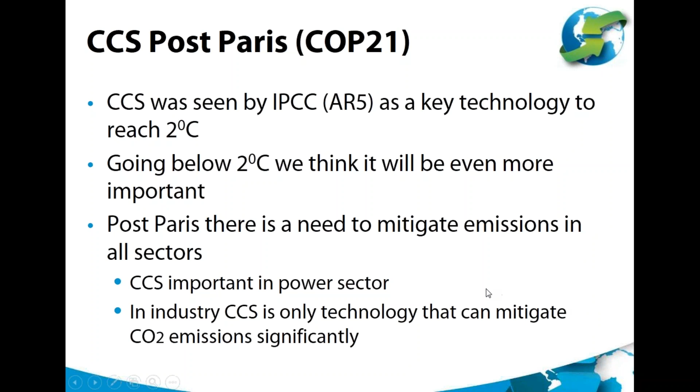A lot of the work we've done has already shown that CCS is important in mitigating emissions in the power sector, but increasingly we're seeing that CCS for industry, particularly heavy industry, is probably the only technology that can really mitigate CO2 emissions significantly in that area. So this work is very important to us.

We've undertaken a number of case studies over the years. We started working on the cement sector in 2008, and did a very detailed techno-economic assessment on an integrated steel mill in 2013. This latest study in the series, on pulp and paper, will be followed quite quickly by work on hydrogen production and methanol urea manufacture. We also have a hydrogen refining study and an LNG production effort underway.

So this year will be the culmination of all our work on industrial CCS, and then we propose to do a covering summary of everything that's happened in this area at the end of it, particularly aimed at advising policymakers.

One key learning, which my colleague Stanley Santos always advises, is that CCS in industry is very site specific. So where we do a detailed study on a specific area, you can't really generalize that into conclusions on how CCS and costs might occur across the whole sector—it's probably far more site-specific than the power sector. Nevertheless, each study is very opportunistic in its own right and delivers a set of information that helps us build the bigger picture for industry-based CCS and the costs associated with it.

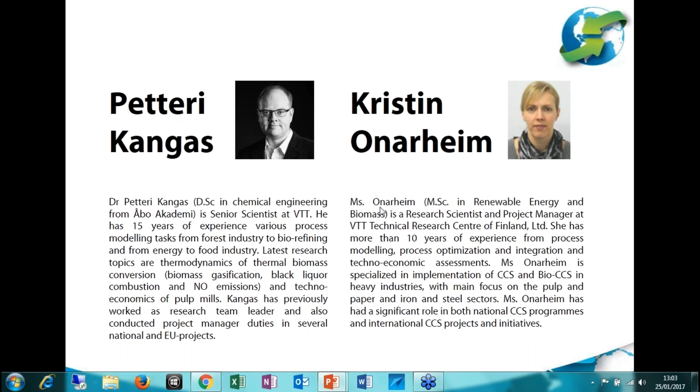Thank you, John, for the introduction, and good afternoon, everybody. We are presenting today the results of assessing the retrofit of post-combustion CO2 capture in the pulp and paper industry. I'd like to acknowledge my co-authors in this work: Stanley Santos from the IEA Greenhouse Gas R&D program, my colleague here today Petteri Kangas from VTT, and Ville Hankalin from ÅF Consult in Finland. This work was undertaken as a cooperation between the Finnish National CCS program and the IEA Greenhouse Gas R&D program.

In order to limit the global temperature increase to 2 degrees Celsius or even lower, as laid out in the Paris Agreement, the IPCC calls for solutions that can allow for negative emissions and actually remove CO2 from the atmosphere. Removing CO2 from the atmosphere could be possible by capturing and permanently storing CO2 generated during conversion of biomass.

An important prerequisite for assuming carbon negativity is sustainably sourced raw material, because if raw material is not sustainable, there is a risk that we don't only miss out on any carbon negative potential, but in the worst case, we can even go carbon positive.

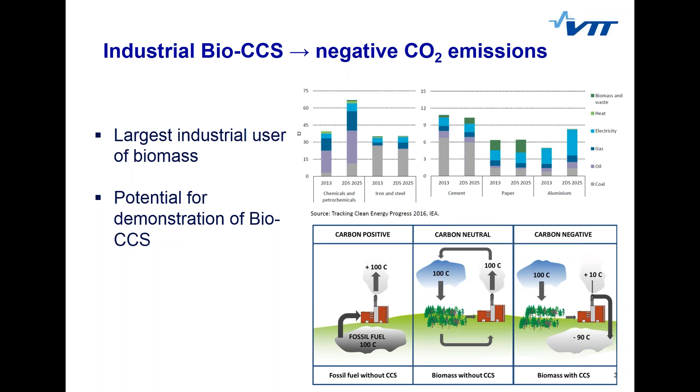So I would like to hand over the presentation to my colleague Petteri Kangas, who will present the reference pulp mills evaluated in this study.

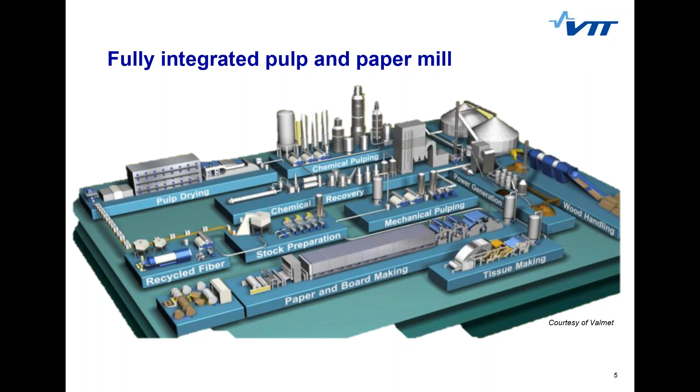Our reference pulp and board mill is located in Nordic countries such as Finland, Sweden, Norway, maybe Canada, Russia. Here is a picture of an overall pulp and paper integrate. In our study we didn't include all of these units, but we had either a standalone pulp mill or an integrated board mill. Typical units such as wood handling, chemical pulping, pulp drying, stock preparation, board machine, and related chemical utility plants are included in this reference mill.

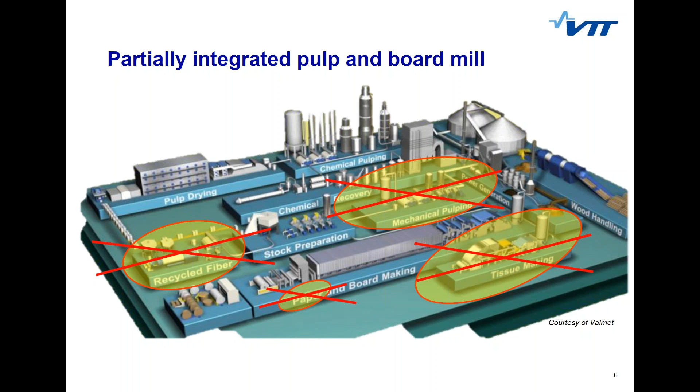Heavy fuel oil is in our case utilized in the lime kiln for producing heat or running the kiln. Then some fresh lime is also used for the process.

In general we have three different sources for CO2 emissions. The one I just talked about, the lime kiln, is one. The second is the multi-fuel boiler, where all the bark and wood residues are burned. And by far the largest source of CO2 is the recovery boiler, which is utilized for converting the black liquor to energy and then recovering the cooking chemicals.

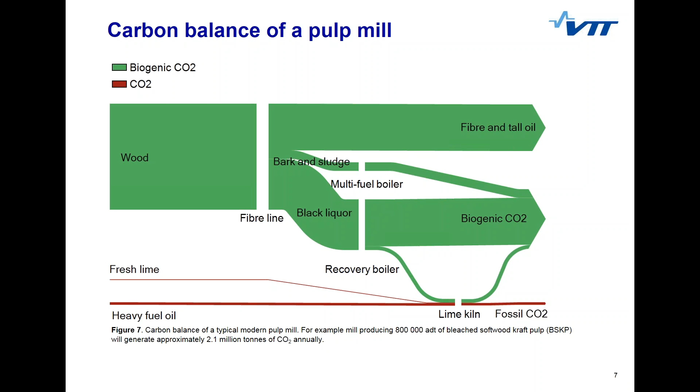One particular thing for the pulp industry is the lime kiln. If you think about the cement industry, these rotary kilns are a large source of CO2 emissions. But in the pulp industry, in fact, almost all CO2 is biogenic, because the CO2 is eventually coming from the wood.

It is dissolved within the pulp digester. Then the black liquor, containing the lignin and part of the hemicellulose, is combusted in the recovery boiler, and the CO2 is converted to sodium carbonate.

Then this sodium carbonate is again converted to sodium hydroxide, and the carbon dioxide goes with the calcium carbonate. The calcium carbonate is burnt, or calcinated, in the lime kiln, and all this CO2, which is originally from wood, is released.

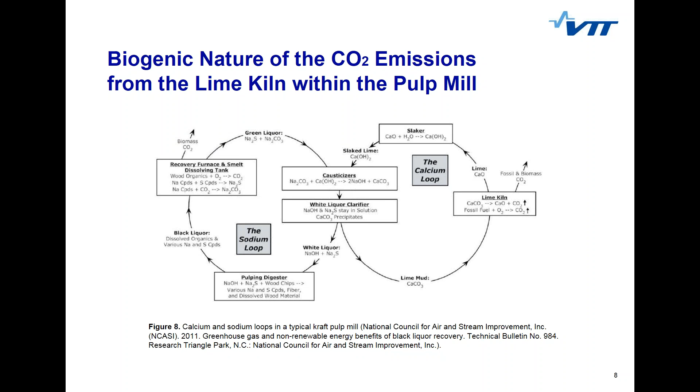So practically, the calcination reaction's CO2 is coming from biogenic sources, and only the fossil fuel utilized for running the kiln is fossil-based.

If we look at the reference mill in general, we have this fiber line where the wood comes in, it's delignified, then it's bleached for removing the brown color, and finally dried in the pulp dryer. If we are talking about the standalone mill, then the pulp is sold outside.

The production in our reference mill is 800,000 tons of pulp annually. It's a little bit smaller than, for example, the new pulp mill currently being built in Äänekoski in Finland, with a capacity of something like 1.2 million tons annually. But otherwise this represents a typical, modern pulp mill.

In that case we have quite a lot of excess heat and electricity available because the processes are efficient. If we look at the recovery line, we have evaporation where black liquor is evaporated, then it's combusted in the recovery boiler, then the lime kiln for recausticization and so on. The multi-fuel boiler is used for combusting the bark and other residues.

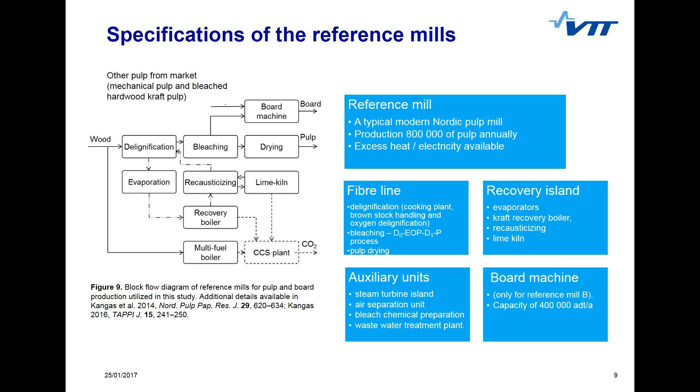In the second reference mill, we call it base case B, we also have the board machine included. The major difference here is that the board machine is of course utilizing some of the heat, electricity, and also pulp, so we do not have as many gigajoules available for the CCS plant to run—less excess heat available in this second reference case. If we go further, we see the rough material balance of this mill.

The wood utilized for producing 800,000 tons of pulp annually requires 4.6 million cubic meters of Nordic pine and spruce altogether. We also use cooking and bleaching chemicals, with sodium hydroxide about 30,000 tons annually. Quite a lot of cooling water, mainly for running the turbine, is needed, but luckily our mill is located by the coast or by the river, so that can be handled.

Electricity utilized or produced in the mill is 900 gigawatt hours per year for the standalone mill, and for the integrated case a little bit less, 530 gigawatt hours per year. Besides the electricity, the other important side product from the pulp mill is crude tall oil, about 30,000 tons per year produced.

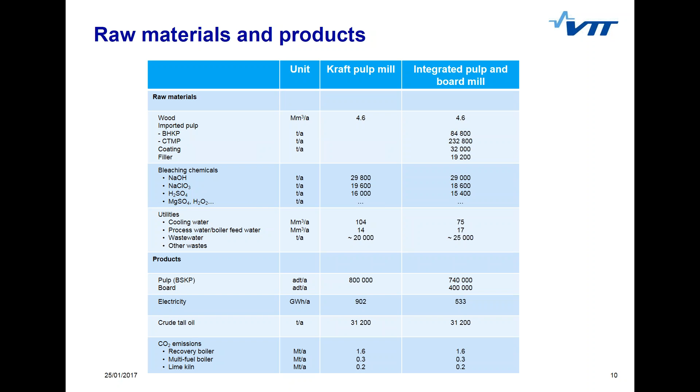Looking at CO2 emissions, the recovery boiler is by far the largest source, 1.6 million tons every year. The multi-fuel boiler and lime kiln are at a similar level, about 0.2 or 0.3 each year.

Looking at this plant, for the second case we are utilizing high pressure and medium pressure steams at about the same level, but for the case where the board machine is included, we need more low pressure steam for running the board machine, and that is steam away from being utilized in the CCS plant. The same phenomenon can be seen for electricity consumption.

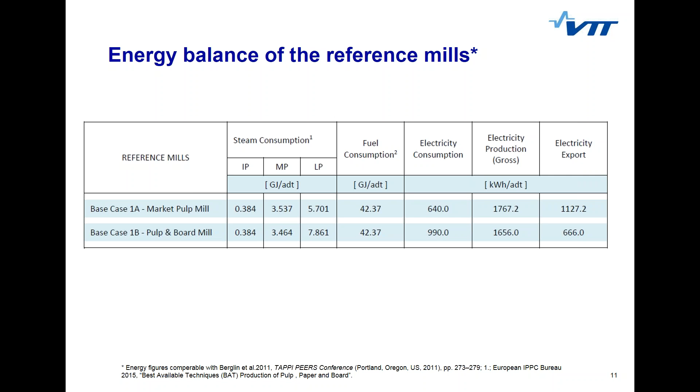For the standalone pulp mill, it's 640 kilowatt hours per ton of pulp, but in base case B we have 990, when we are producing about 400,000 tons of board besides this pulp every year. That will result in less electricity export, and if we are utilizing heat, that will reduce the amount of electricity export further. If we consider this electricity as green electricity, that might be a side effect of installing this CCS plant.

When we are talking about utilizing this excess heat from the pulp mill, we have defined that the CCS plant is mainly utilizing 2-bar steam, and we have three different options to take the steam or integrate the CCS plant to the mill itself.

The first option is to utilize the low pressure steam and reduce it to 2-bar steam. If that is not enough, we can take a little bit higher medium pressure steam, 13-bar steam, and get a slight increase in the amount of 2-bar steam by utilizing that.

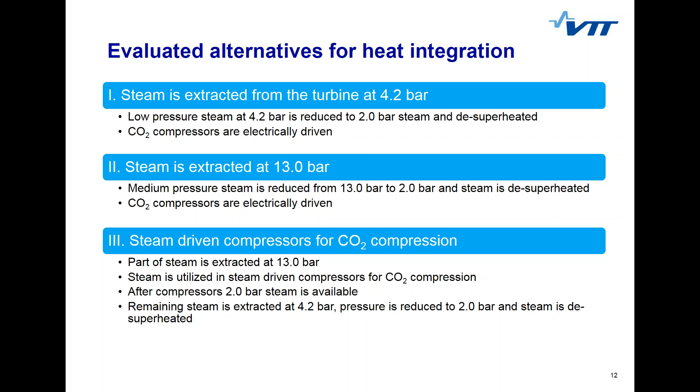The third option is to install steam-driven CO2 compressors, in which case we will have a little bit better process integration available. In cases where steam or heat is not enough or not available, we have the option of installing an auxiliary boiler for producing the excess steam for the plant.

When we are talking about the reference mill, if you want to buy this kind of pulp mill for the standalone case, we are talking about 800 million euros investment, and for the integrated pulp and board mill it's 940 million euros. The largest or most expensive parts are the recovery boiler, then the pulp dryer, board mill, and then the cooking plant.

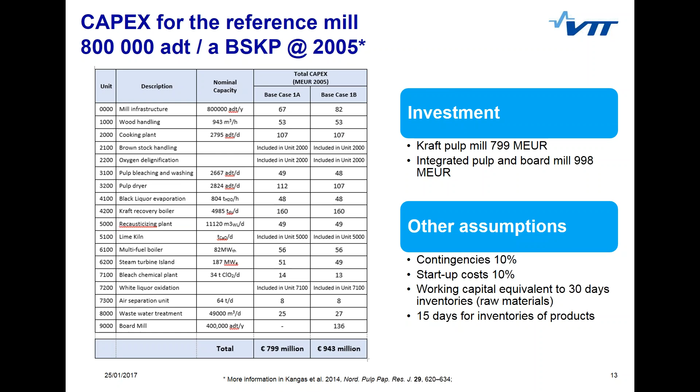All of them are over 100 million in investment. Finally, looking at this reference mill, what is the levelized cost of production of pulp? We see that the value here is 523 euros per ton, and the largest factors here are raw materials, mainly wood, and then capital expenditure, which is the second largest, but all the others are minor.

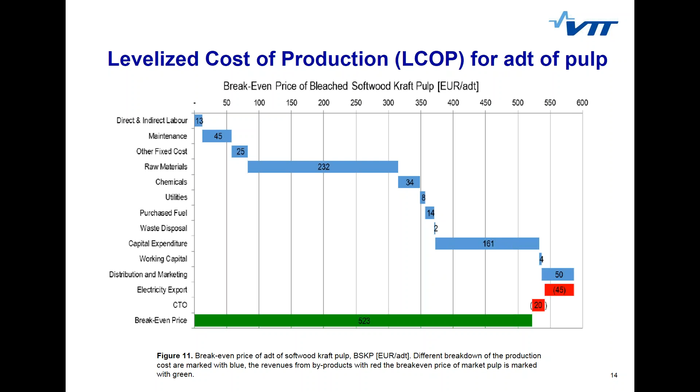Looking at the electricity and the crude tall oil, we gain some benefits, because we are considering the pulp as the main product, and these side products will result in some lower value for the pulp price. Looking at the board price, here 679 euros per ton is achieved.

The raw materials here come from the pulp mill, but also some purchased pulp is utilized, and that is almost the only cost factor seen here. Of course capital has something to do with it, and then we need some electricity for running the mill.

If we are utilizing the board mill or installing the board mill, we will have less excess electricity available, and that will also affect the cost structure of the whole integrate. But these are the base cases 1 and 2, the standalone mill and the integrated pulp and board mill.

Now Kristin will continue and tell about how the CCS plant is installed here, and what the effect of those is also for the cost structure.

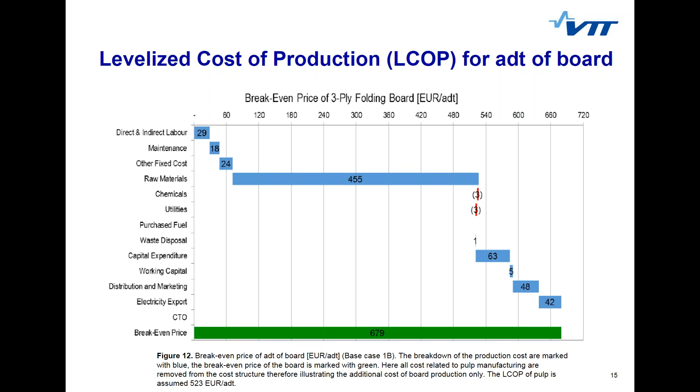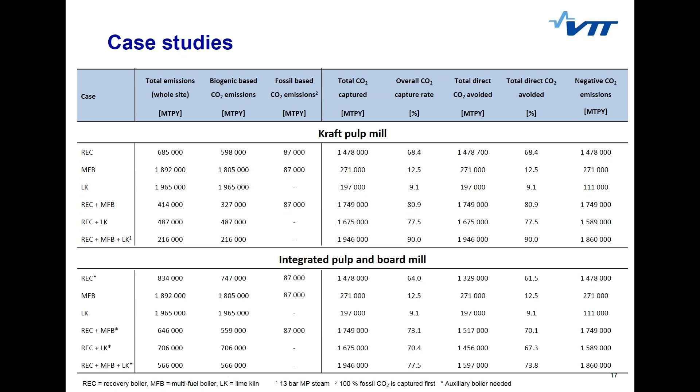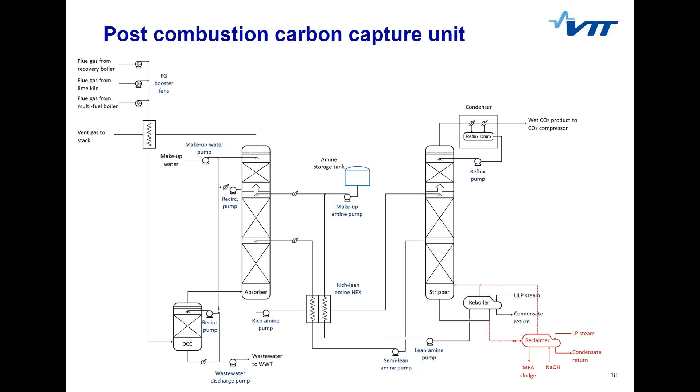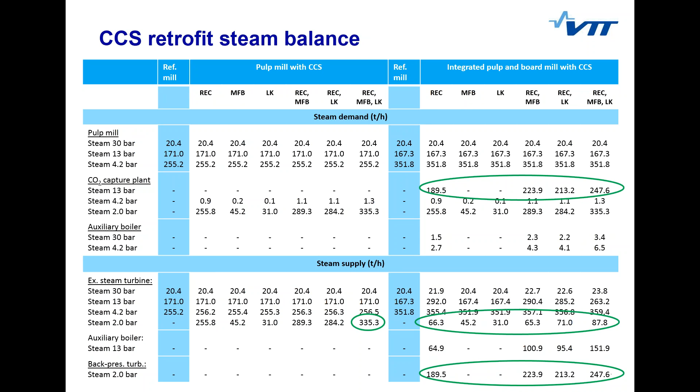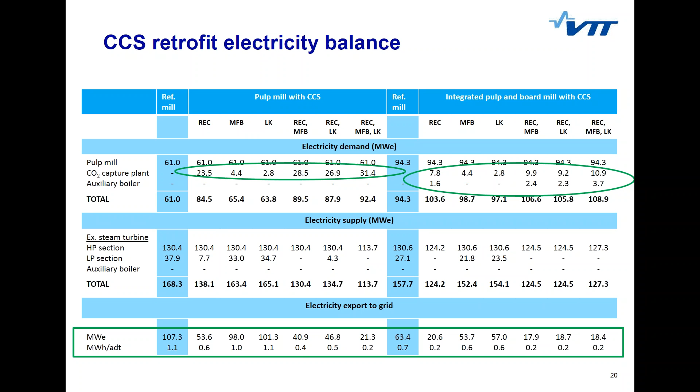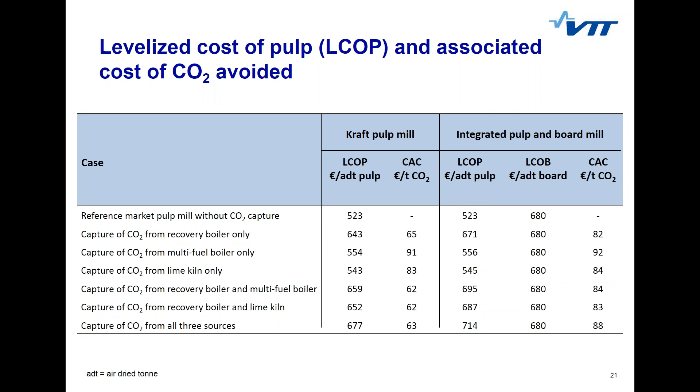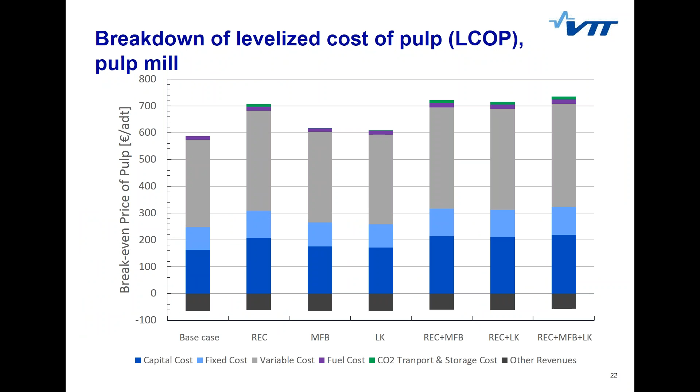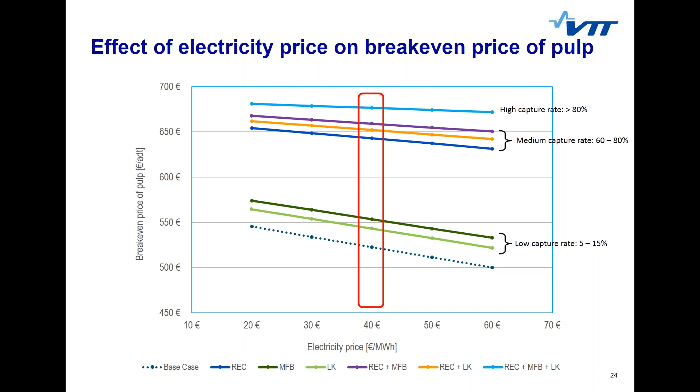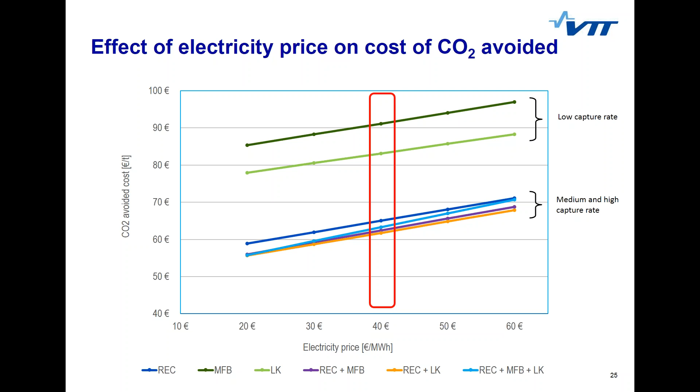Now, these figures compare the two extreme cases when biogenic CO2 emissions are recognized as neutral and when they are not. So we are comparing scenarios 2 and 3.

On the left-hand side, the CO2 emissions are recognized as neutral, and due to the large share of biogenic emissions from the pulp mills, we don't expect any major impacts on the price of pulp, even when the CO2 tax increases quite significantly.

For comparison, on the right-hand side, we assume that biogenic emissions are not recognized as neutral, which means that all CO2 emissions are taxed, and now we can expect to see a significant effect on the levelized cost of pulp.

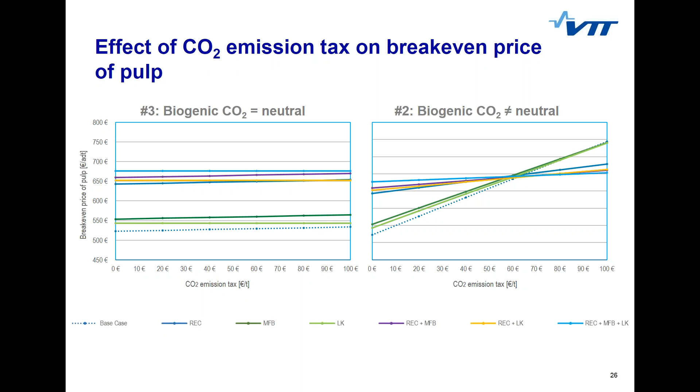This could allow the sector to actually create a new source of income with bio-CCS.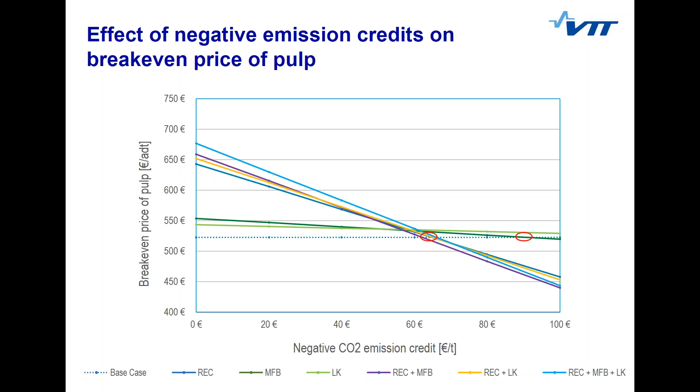Going to the concluding remarks, as mentioned in the beginning, the retrofit and integration of CCS, especially for the pulp and paper industry, is very site-specific, but this study gives a reasonable baseline information.

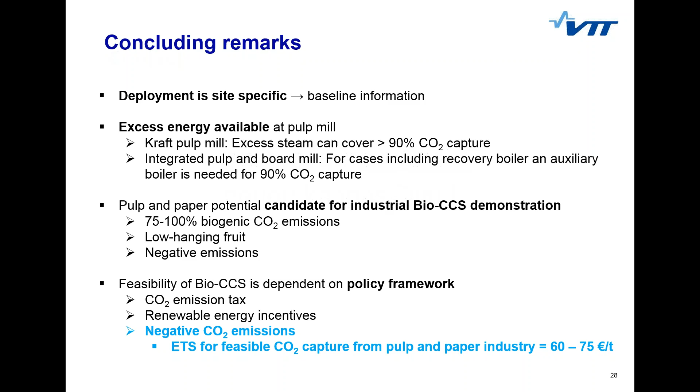So if you have any further questions that have not been addressed here today, please feel free to contact us. With that, I would like to thank you for your attention, and I'll give the word back to John.